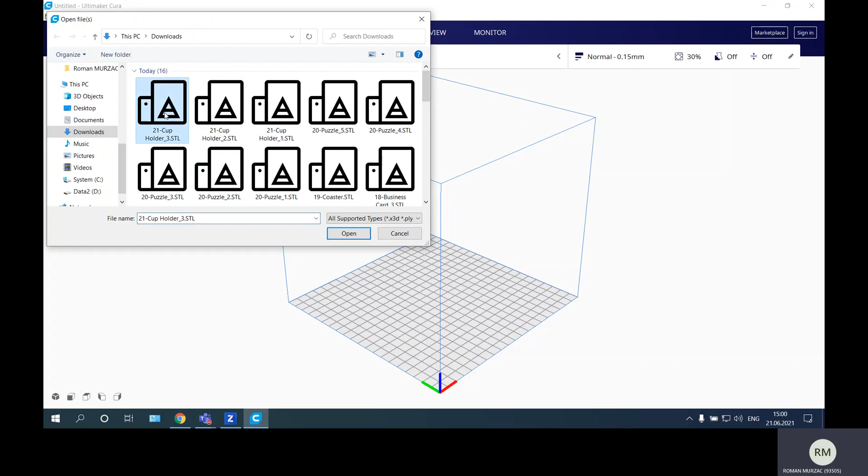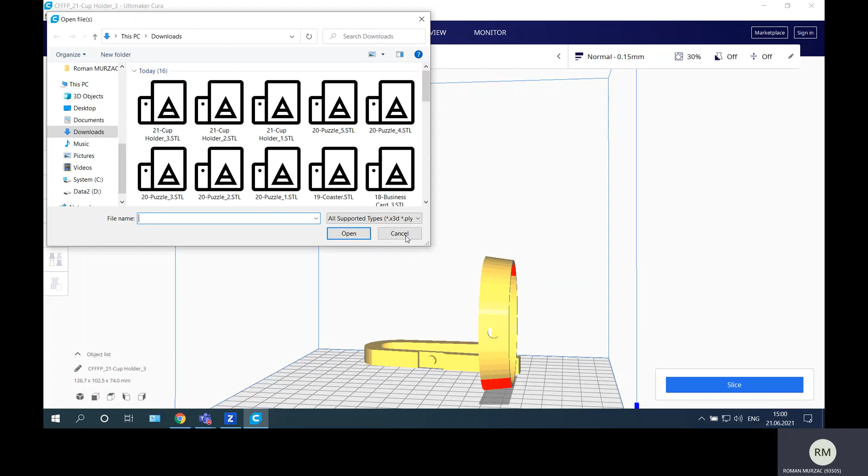We downloaded all STLs, and now I will upload them, all 3 STLs, but there should be... okay, why is it just 2 of them? Where is the second ring? Sorry. Why did I upload just 2 of them? Sorry, I will upload them again. Sorry about this. Oh, okay, so here are all 3 of them.

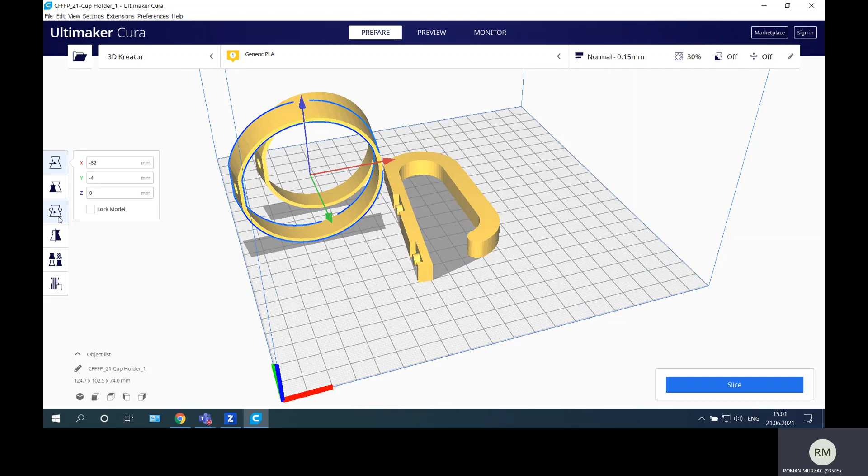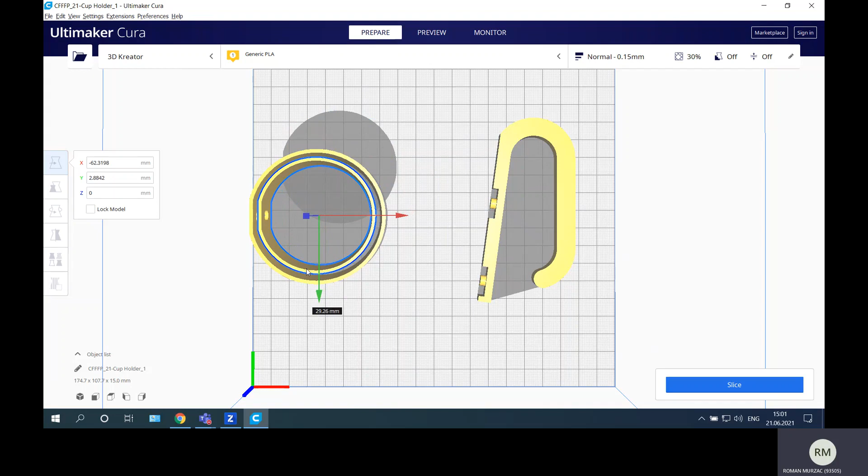So I will prepare the printing settings. First of all, I will orient them. I will orient this and align it to this face, and this one also align with this face. Good. And now just change the position of the elements. Drag this a little bit to 50 millimeters, and I will check if I can do them like this, in order to decrease the moving of the axis.

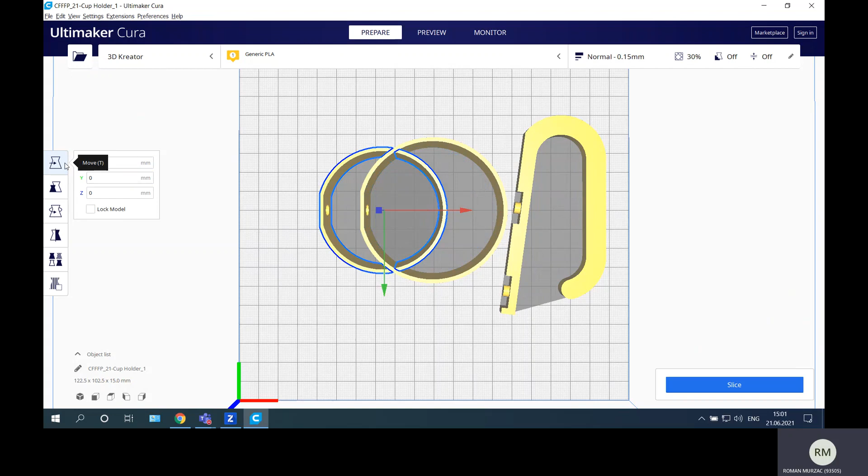So I just set up 0, 0, and now change a little bit, minus 25 for both rings. So they are concentric here. And for this holder, I put 0 here and 35. I put these 2 rings of the cup holder concentric in order to decrease the time of moving the nozzle from one ring to another. They will be in very near positions, and this will decrease the time.

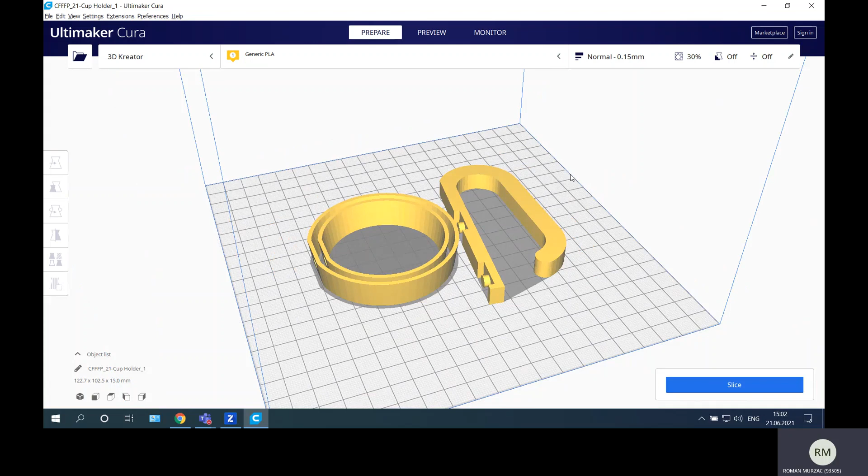If I have the option to put one component in another without any point of intersection, I can do that. In this case, I prefer to put these rings concentric. Here will be 0.15 millimeters of profile, and the quality is the same. The shell will be 1 millimeter, but I will put 1.2 because this product should hold another product like a cup, and I want bigger resistance. So here will be 50 or more percent of infill.

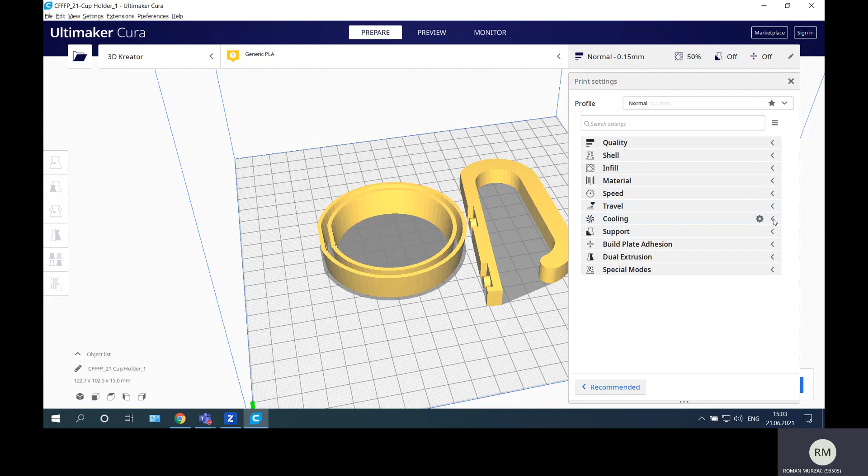The material will be 210 degrees for the nozzle and 60 degrees for the build plate. The speed will be the same, 50 general speed and 50 for infill, 25 millimeters per second for wall and initial layer. Travel enabled, cooling enabled. For support, we need it on these pins and on the holes where the pins will be inserted. So I will activate support structures everywhere at 45 degrees overhang angle, line pattern and 10% density, without any other type of build adhesion.

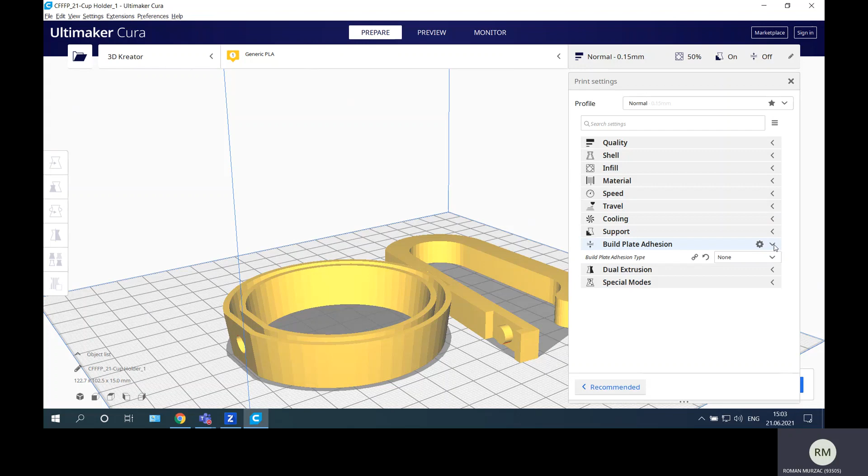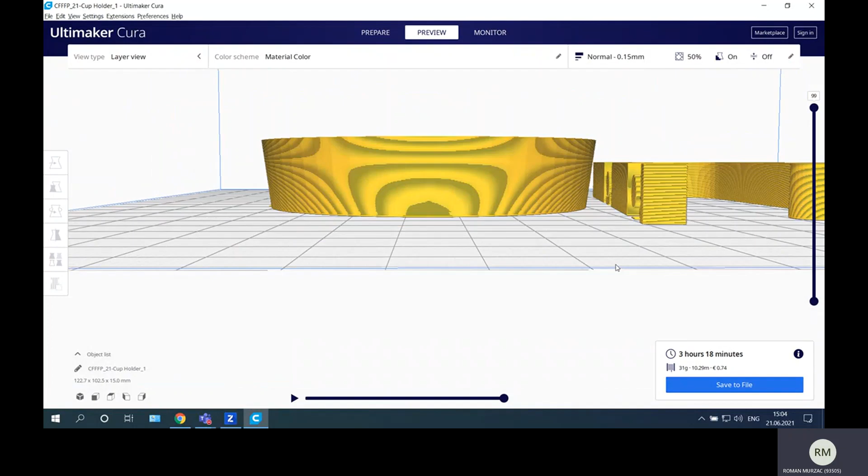So just slice this and see what we obtain. You can see that in the holes we had support in order to generate that surface, and on these pins we also had support. So in this way we ensure that this product will have good surfaces. Go to desktop and save it as cup holder G-code.

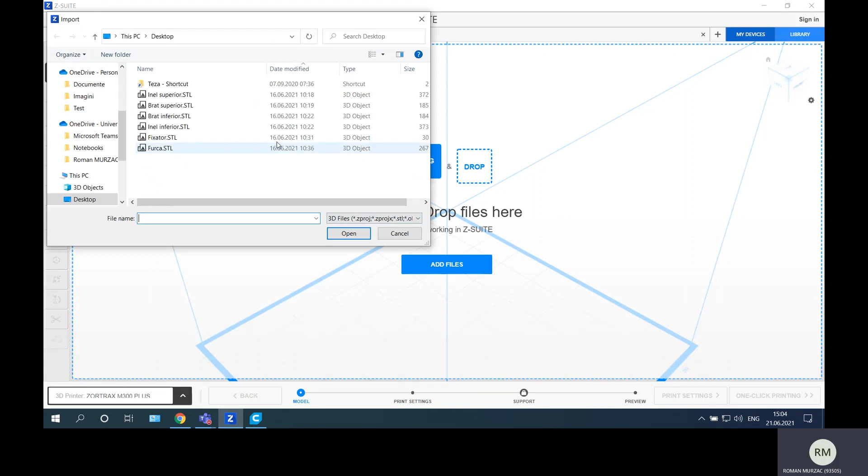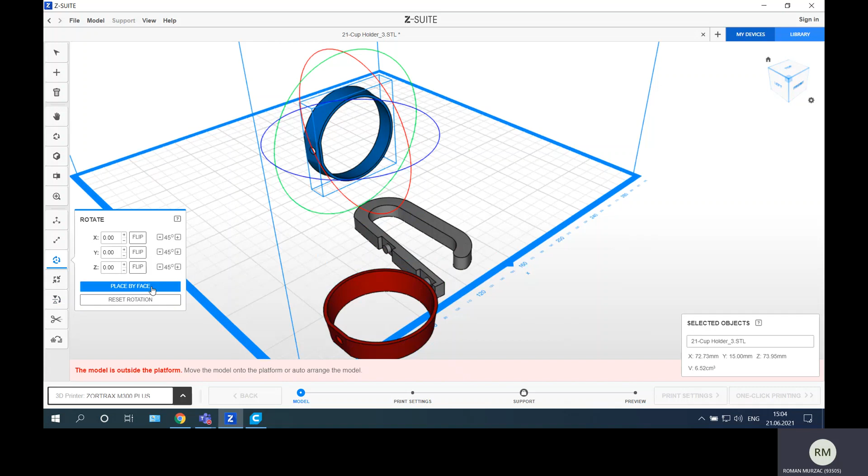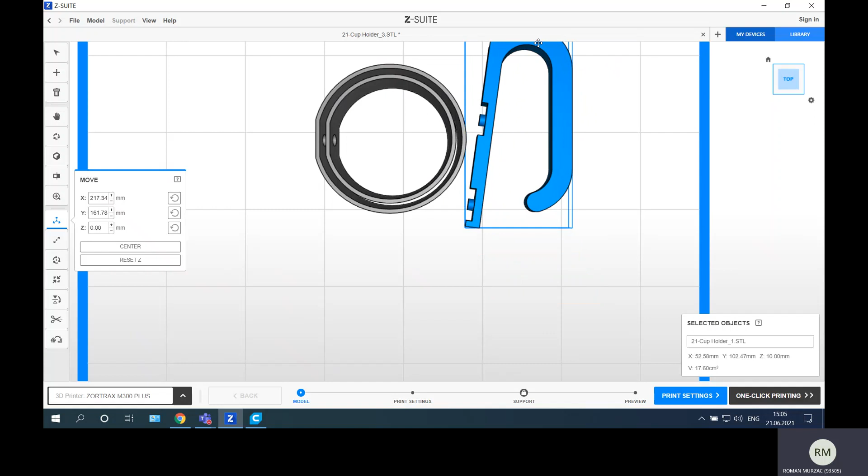Now switch to Z-Suite, open an M300 Plus project and select all 3 STL files from desktop, and again orient the parts. Select the first part, go to rotate, place by face, show the face, then the second one, place by face, show the face. This is in position 155, and this will be in the same position, concentric like the previous one, and this one near the first one to decrease the time.

Go to printing settings, ensure that this is HIPS material, that we have support structure, and the overhang angle will be 45 degrees. Ensure the nozzle diameter is 0.4 millimeters. Choose a layer thickness of 0.19 millimeters, normal quality, normal trajectory, perpendicular pattern direction, and 50% infill because this part should support another part. 5 layers for top, 5 for bottom, seam random. First layer gap between part and raft 0.33 millimeters, and platform gap from the raft 0.25 millimeters.

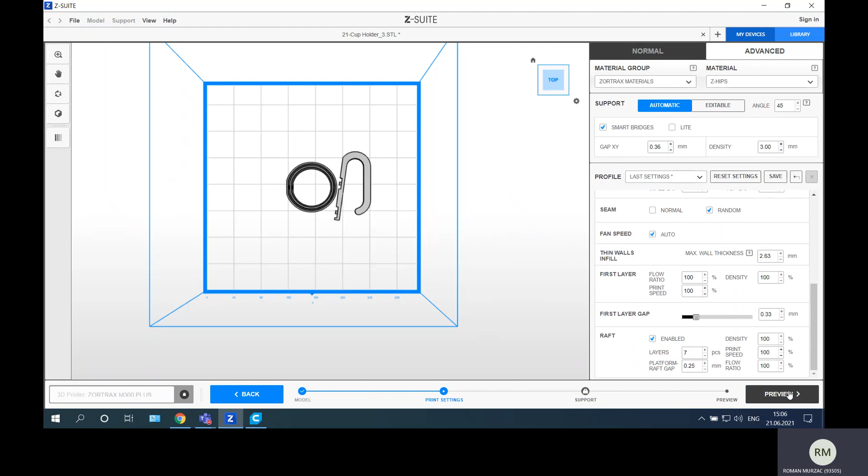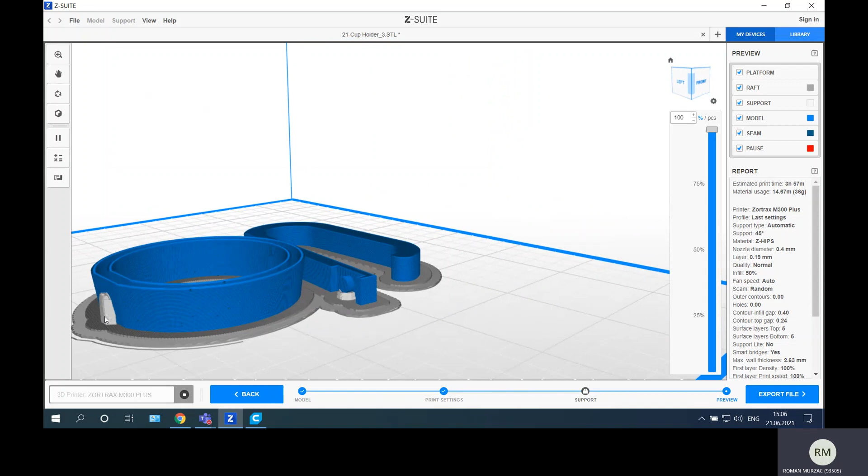Go to preview, check if we like the result, and if it's okay, just save the file, and we will take a look inside. We can see the support structures added by the software for the holes in the rings and for the pins. So this is the result that we obtain, and here are all the settings that we can use for some projects.

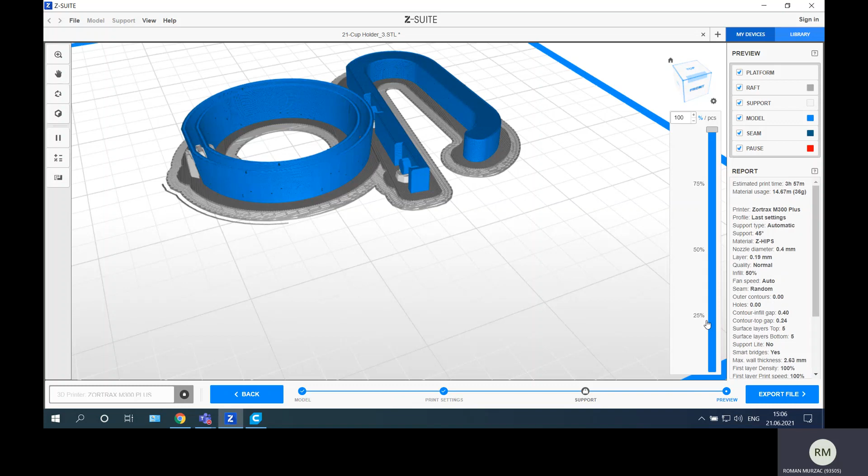I like how my project looks, so I just export it to desktop as cup holder and save it. On the desktop we find the cup holder G-code for 3D Creator and the cup holder Z-code for the Zortrax M300 Plus printer. That was the additive manufacturing setup and code generation.